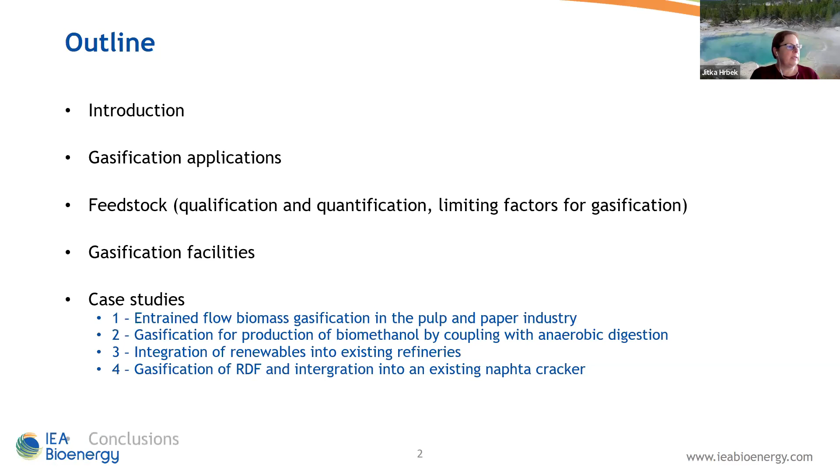Okay, let's start. To outline my presentation, I will start with a short introduction on the topic, then some words on gasification applications and feedstock which is suitable for the gasification process. Then I will describe a few gasification facilities, and we will come to case studies. The report we published in December last year has 4 different case studies on how gasification can be implemented in other technologies. At the end, I will make short conclusions.

So, as I told you, last year we in the task published a report on gasification applications in existing infrastructures for production of sustainable value-added products. Here is the link at the bottom. Here you can find the publication including these 4 case studies, and the aim of the project was to show the high potential of the gasification technology, also to mention the limiting factors for gasification, and last but not least to provide the data for the analysis carried out by Task 42, which will be presented by Johannes today.

Some words on gasification applications. On this figure, you can see a nice overview. We will start with, at best, dry solid feedstock, but wet feedstock is also suitable for gasification. After the gasification, we get a producer gas, and after cleaning and conditioning, we get a syngas. This syngas mostly consists of CO and hydrogen. And from this syngas, it is possible to make several products.

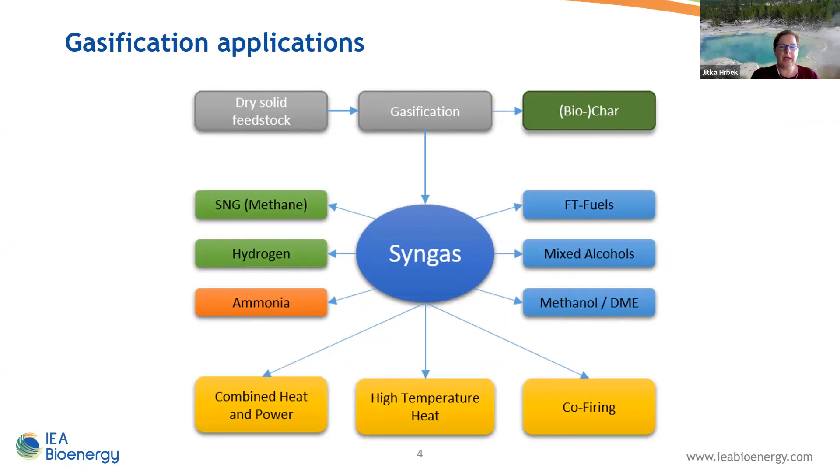Gaseous products on the left-hand side, you can see SNG, hydrogen, ammonia, and liquid products: Fischer-Tropsch fuels, mixed alcohols, methanol or DME. And syngas can also be used for the production of heat, for combined heat and power, high temperature heat, or in co-firing.

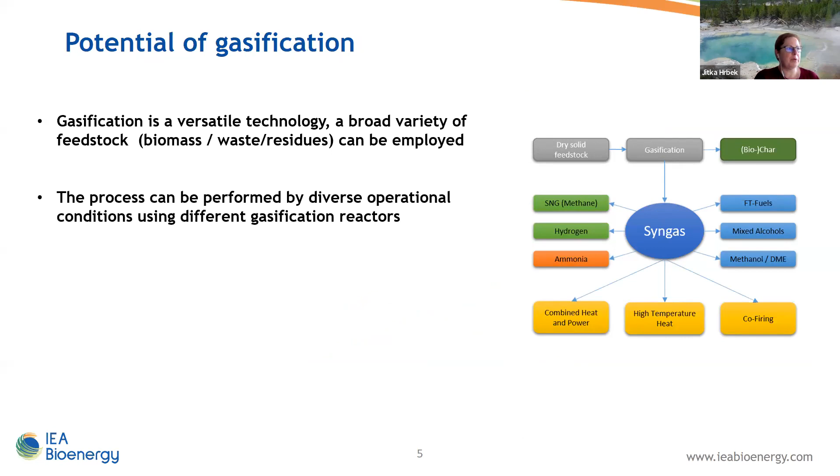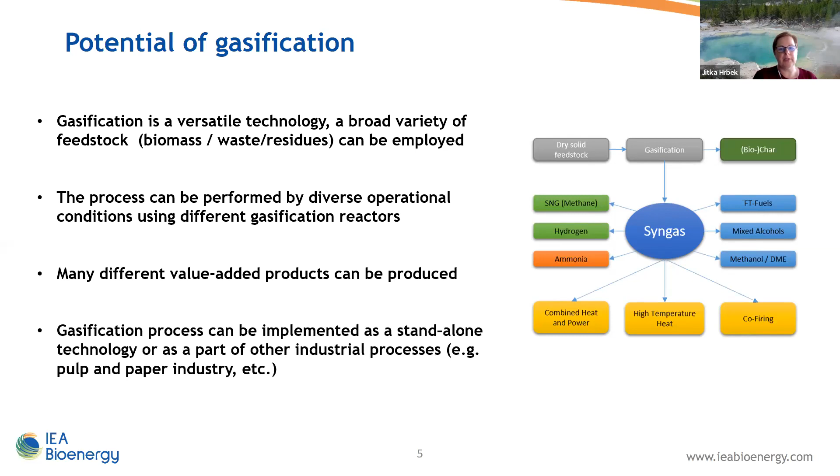Some words on the potential of gasification. Gasification is a great technology because a variety of feedstock can be used. Not just clean biomass is suitable for gasification, but also residues and waste materials can be employed. The process can be performed under diverse operational conditions using different gasification reactors. And as I already told, many different products can be made in this way. Gasification can be implemented as a standalone technology, or in synergy with other industrial processes.

Something to feedstock, which is suitable for the gasification. Here is an overview. There are three main categories: woody biomass and waste, agricultural residues, and residential and industrial waste streams. And if you look at the right side, there is a table which was published by WBA, the World Bioenergy Association, and you can see the potential of the biomass or residues.

I have to point out that in the table, no residential and industrial waste are mentioned. It means the potential is even higher. So if you look at the potential in year 2035, you have here 150 exajoules. And for comparison, the power consumption in Germany in 2021 was about 2.1 exajoules. So the potential is really, really high.

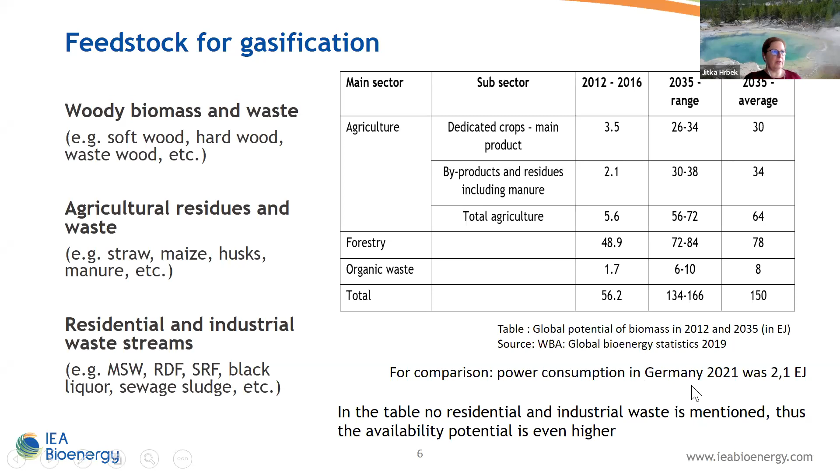So the feedstock: in the report, there are some limiting factors described, which should be mentioned if we are talking about gasification. For the gasification process, the feedstock must be adjusted. It means the size, the impurities must be removed, and the feedstock must be adjusted for further processing. Important is also the feedstock moisture, which has a strong effect on the process efficiency, and also the chemical composition of the feedstock. Carbon, nitrogen, sulfur, chlorine, alkali metals, and trace elements are very important for the right gasification process because they influence the further products.

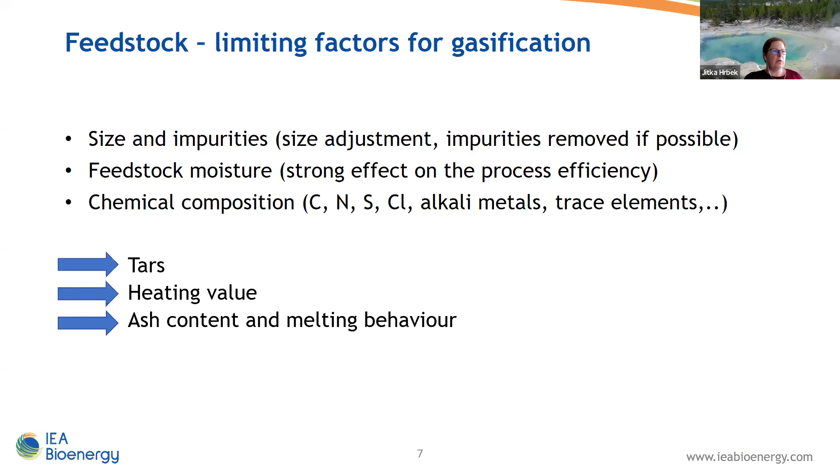Byproducts, tars, heating value of the gas, and the ash content and melting behavior. So if the feedstock contains a lot of chlorine or alkali metals, you have a problem with the melting temperature. Here is an overview of gasification facilities, which are also mentioned in the report. We didn't mention plasma gasification. We described just the classical gasification reactors: fixed bed gasifier, fluidized bed, and entrained flow gasifier.

And now we are coming to case studies. Case studies are the main focus of the whole report because we wanted to show that gasification can be implemented in other technological processes to boost the production or to achieve high efficiency. So case study 1 is on entrained flow biomass gasification in the pulp and paper industry. The author was Joakim Lundgren. He is unfortunately not available today, but he will be able to answer questions per email.

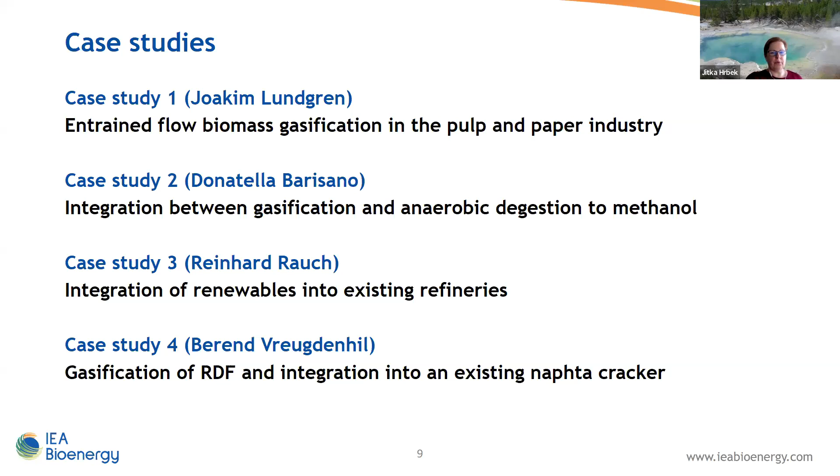The second study was on integration between gasification and anaerobic digestion for production of methanol by Donatella and her colleague. The third case study was made by Reinhard Rauch; the topic was integration of renewables into existing refineries. And the fourth case study by Berend Vreugdenhil: gasification of RDF and integration into an existing naphtha cracker. So case study number 1, entrained flow biomass gasification in the pulp and paper industry.

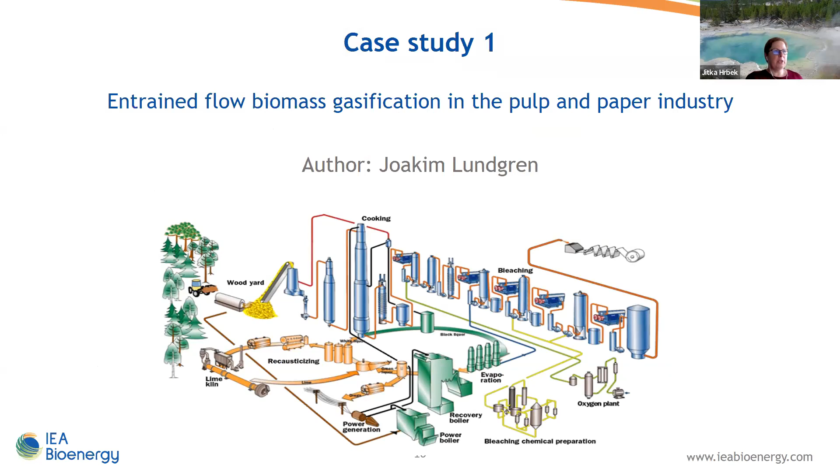As an introduction, I have to point out that pulp and paper plants are really highly suitable for the integration of biorefinery concepts and thermal gasification-based concepts, and byproducts can be used in the process. The product gas can be used for high temperature heat for the companies, for the process itself, or it can be upgraded in more advanced applications like biofuels or biochemicals, and as well for drying purposes, which are needed for several technological processes.

So what are the benefits of integration of gasification in pulp and paper industries? It's an efficient heat integration, as I said already, high temperature heat, for example. The investment costs are reduced because there is co-use and synergy of existing processes and equipment. And there is also experience in feedstock handling, processing and utilization. Here are several examples of integrated gasification units in pulp mills. Most of them are in Scandinavian countries, but also in China and Indonesia, and mostly they replace heavy fuel oil, or they are used for high temperature heat in the process.

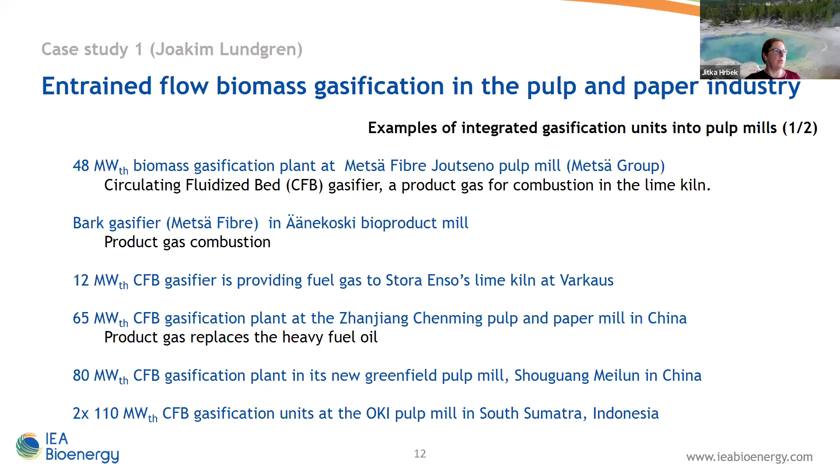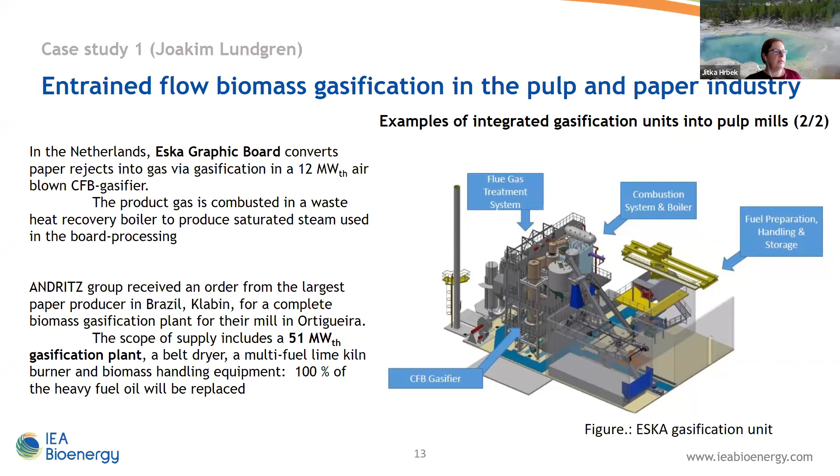We have also some other examples. For example, in the Netherlands, we have the Eska Graphic Board company, which converts paper reject into gas via gasification in a 12 megawatt air-blown CFB gasifier, and the product gas is combusted and used for steam production. And we also have the news that the Andritz group received an order to build a gasifier in Brazil. It should be a 51 megawatt gasification plant together with a belt dryer, built in the mill in Ortigueira.

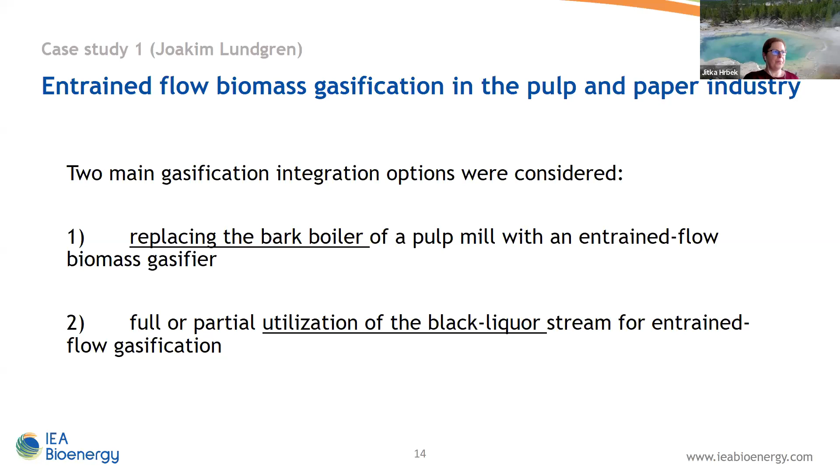In this case study made by Joakim, there were 2 options considered. If we want to integrate the gasification process into the pulp and paper industry, we have the possibility to replace the bark boiler of the pulp mill with an entrained flow biomass gasifier, or the second pathway was full or partial utilization of the black liquor stream for entrained flow gasification. And the results.

Unfortunately, we do not really have enough time to describe the case studies in detail. But here are the most important conclusions. I would like to invite you to visit our website and check the details for each case study.

So to conclusions, Joakim concluded that conditions for biofuels and chemicals production are more favorable in kraft pulp mills due to the already available feedstock, woody residues, and black liquor, which is really fine for efficient heat integration. The overall energy system efficiency is generally higher and the performance is better if it's integrated in a pulp mill instead of a standalone operation.

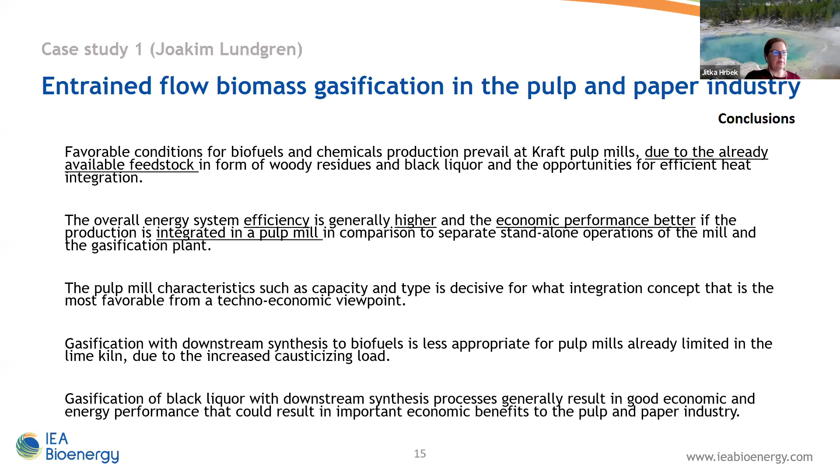And the gasification of black liquor with downstream synthesis processes results in good economic and energy performance. So it's really supported for this process. So this was case study number 1. And now we have case study number 2.

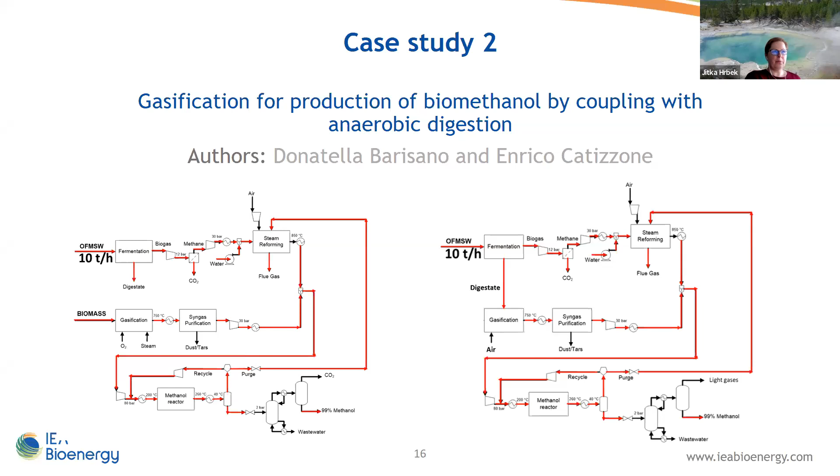The authors are Donatella Barisano and Enrico Catizzone. The topic was gasification for production of biomethanol by coupling with anaerobic digestion. And what were the drivers for this study? It was that methanol has a large employment and it's a key chemical alone, or as an intermediate as well. Anaerobic digestion is a proven technology since many years, and based on many scenarios, the potential is still increasing. So we can see more and more biogas stations over the world.

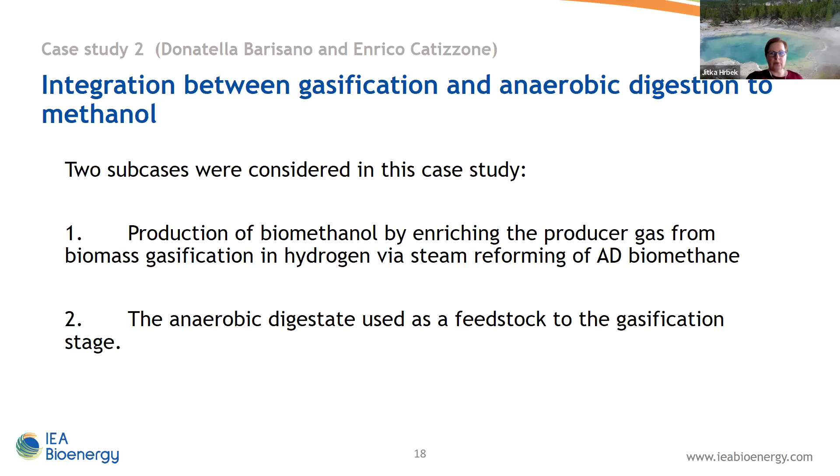And the coupling of thermochemical gasification with anaerobic digestion was chosen to boost the production of biomethanol. Also here, 2 subcases were considered in this case study. The first one was the production of biomethanol by enriching the producer gas from biomass gasification in hydrogen via steam reforming from the AD biomethane plant. And the second case was the anaerobic digestate, which was used as a feedstock for the gasification process.

How did Donatella and her colleagues do it? So something on materials and methods. In subcase 1, the gasification unit was based on a steam oxygen gasification process. It was a bubbling fluidized bed and the temperature was between 820 and 880 degrees. It was coupled with a filter and scrubber. And in subcase 2, a rotary kiln reactor was chosen. Air was used as a gasification agent, and the process was carried out at a temperature between 800 and 830 degrees C.

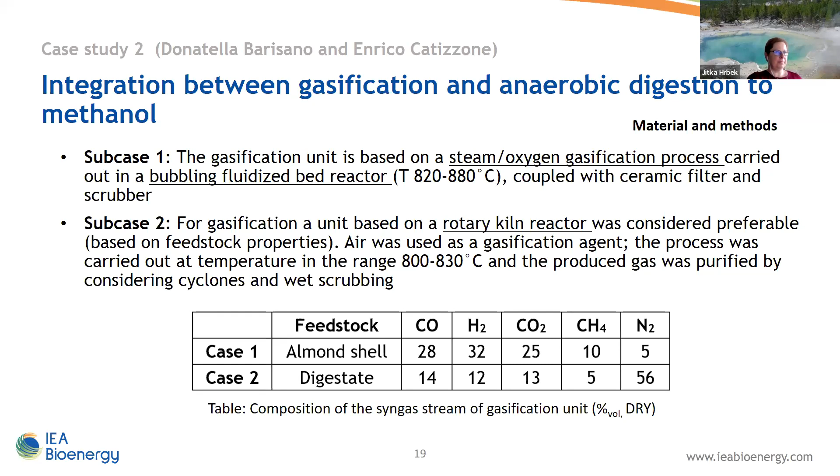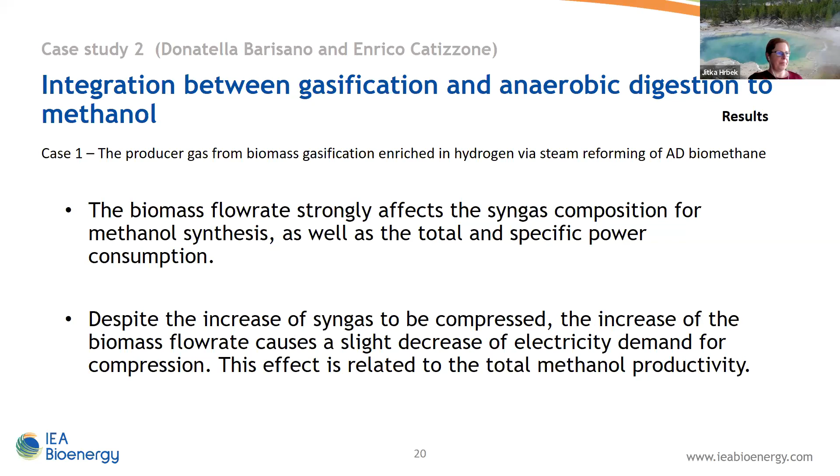So something on the results in case 1. In this case, the producer gas from biomass was enriched with hydrogen from the AD plant. The biomass flow rate strongly affected the syngas composition for the methanol synthesis and the specific power consumption. And it should be said that despite the increase of syngas to be compressed, the increase of biomass flow rate caused a slight decrease in electricity. The effect is related to the total methanol productivity.

And in case 2, the digestate was used as a feedstock for the gasification, and it seems to be a promising way of producing methanol, though the productivity of methanol is slightly lower in this case. It is better in subcase 1, and Donatella thought this may be associated with a different syngas composition. In fact, it provides a possible alternative to use this digestate as a feedstock for gasification if there is enough of it. Otherwise, it is also used as an agricultural soil improver.

So that was case study 2, and now we have case study 3. This case study was made by Reinhard Rauch and his colleagues. The topic was integration of renewables into existing refineries, and how renewables can substitute fossil fuels in the refineries. The aim of the study was to show the complete synthesis pathway of the biofuels. It was studied on site in one of Germany's largest refineries, Mineralölraffinerie Oberrhein. The abbreviation is MiRO.

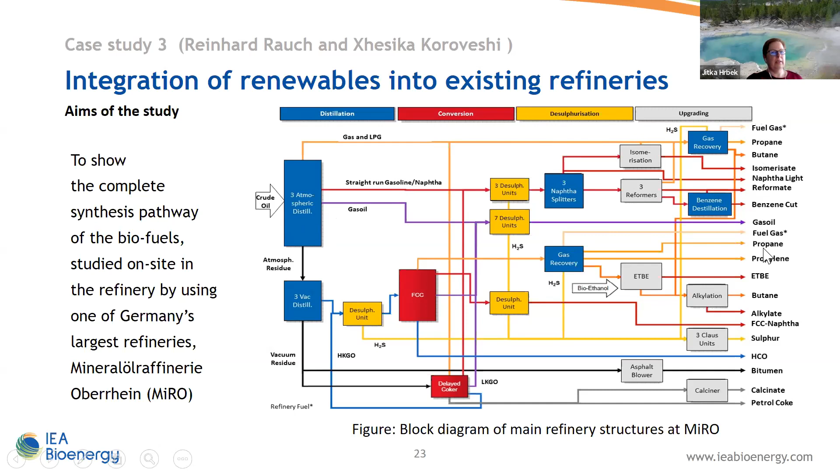Also, in this case study, two different pathways were compared. Sub-case 1 was focused on the Fischer-Tropsch process. This Fischer-Tropsch process is more adequate for synthesis of high-quality diesel. In sub-case 2, it was methanol, DME to gasoline, and this sub-case was focusing on high-quality gasoline components.

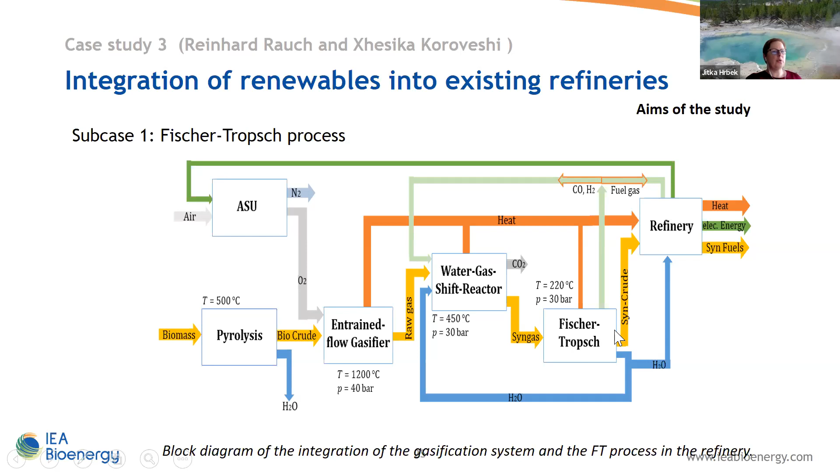So here you can see a block diagram of the integration of the gasification system. It was sub-case 1, the Fischer-Tropsch process. You start with staged gasification. The first stage is pyrolysis, then the biocrude is fed into the entrained flow gasifier, and after water gas shift, you come to Fischer-Tropsch synthesis, and this syncrude will then be sent to the refinery for further processing.

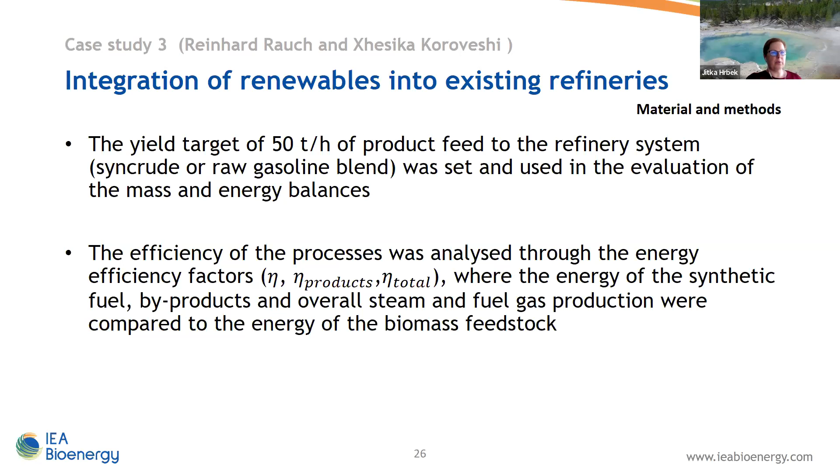Something to materials and methods. The yield target of 50 tons per hour was... feed was mentioned to send to refinery system, and it was set for the evaluation process. And also the efficiency of the process was analyzed through the energy efficiency factors, where the energy of synthetic fuel byproducts and overall steam and fuel gas production were compared to the energy of biomass feedstock.

We have here these two sub-cases. The Fischer-Tropsch raw product can be treated in a refinery as a synthetic crude oil in a similar way and fed with the conventional crude oil into the atmospheric distillation unit. Then it is processed in the refinery structures, and the main end product is expected to be diesel, with byproducts such as gasoline and light hydrocarbons.

The second case, MtG and DtG processes produce a raw product. As I already told you, it's focusing on gasoline. It is comparable in quality and composition to the reformate of the catalytic reformer in the refinery.

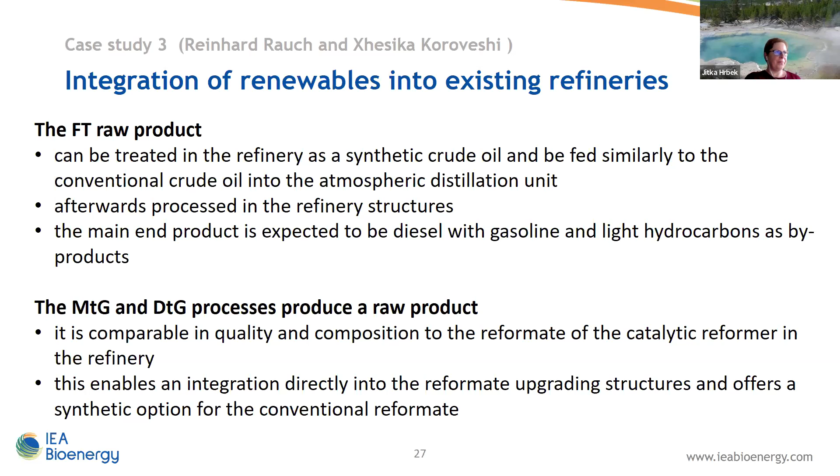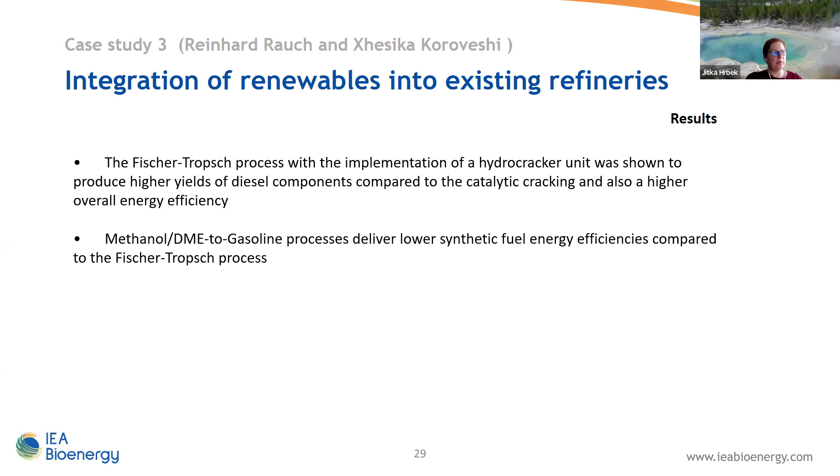And something to the results of case study 3. The Fischer-Tropsch process with the implementation of a hydrocracker unit was shown to produce a higher yield of diesel components compared to catalytic cracking, and a higher overall efficiency. Methanol or DME to gasoline processes deliver lower synthetic fuel energy compared to the Fischer-Tropsch process.

And amongst the methanol to gasoline and DME to gasoline processes, the DtG process could deliver a higher yield of synthetic gasoline, so a higher synthetic fuel energy efficiency compared to the MtG process can be reached. The integration of the Fischer-Tropsch process turned out to be slightly more economic compared to methanol or DME to gasoline processes.

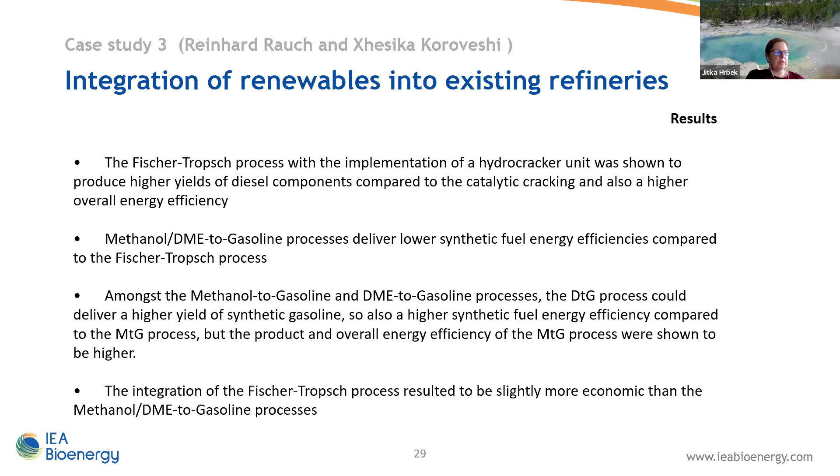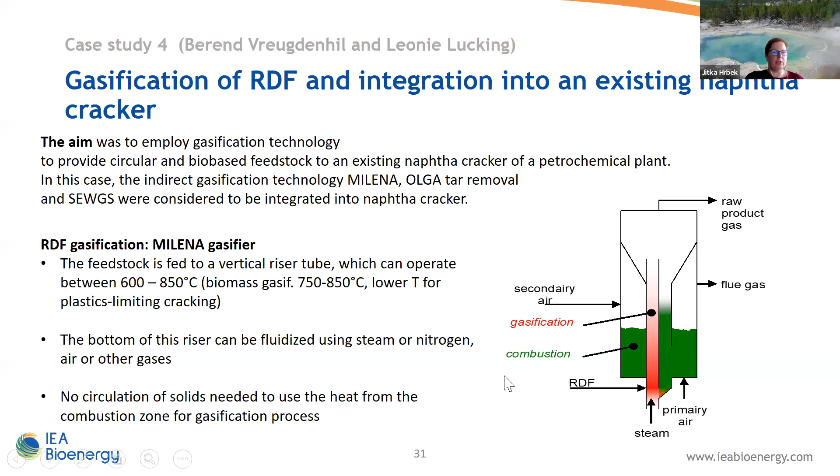There's a gasification part here, and here is the combustion part. The heat from the combustion part can be given to the gasification part. So in this reactor, no circulation of solids is needed. And the bottom of the riser can be fluidized using steam or nitrogen or several other gases. So it's flexible.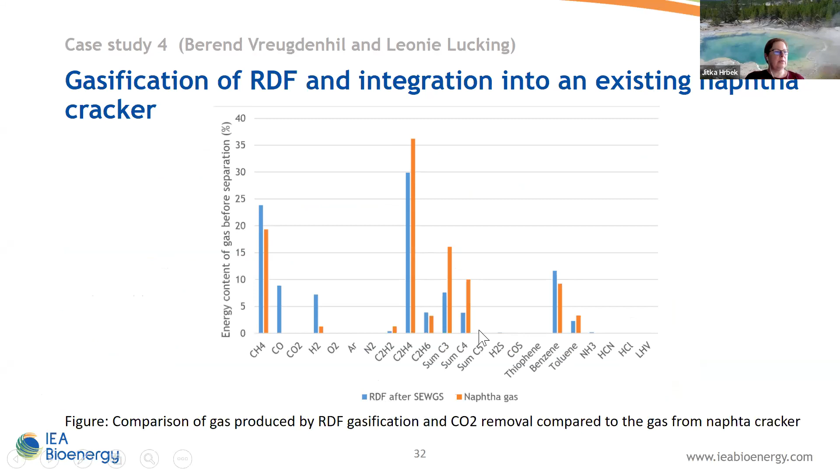Berend also mentioned in his case study the comparison of gas produced by RDF gasification and CO2 removal, and he compared it to the gas from the naphtha cracker. You can see RDF here in blue and naphtha gas in orange. Here is the setting for the mass and energy balance made by Berend. You start with the gasification in Milena, then you have tar removal, and then the sorption enhanced water gas shift reaction.

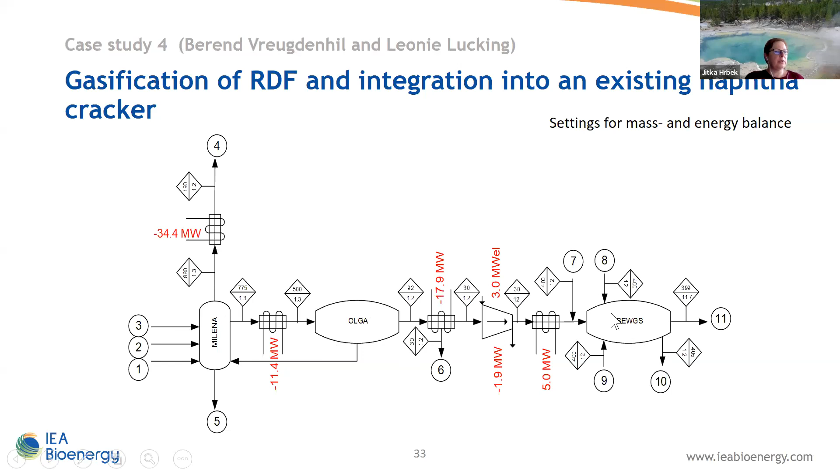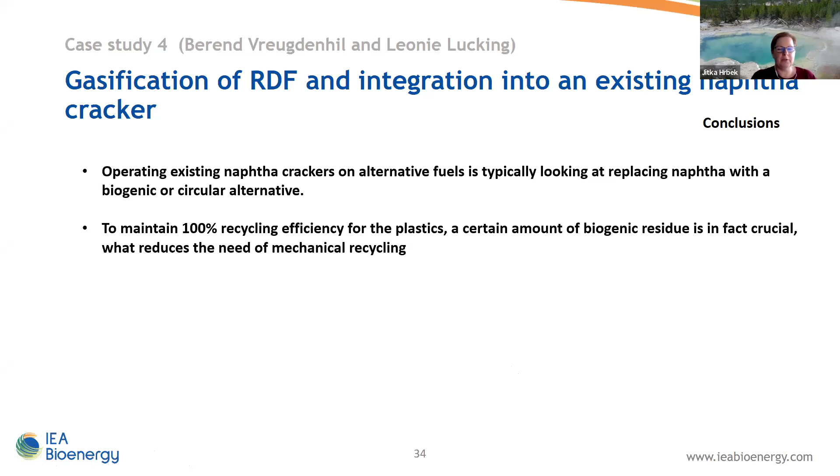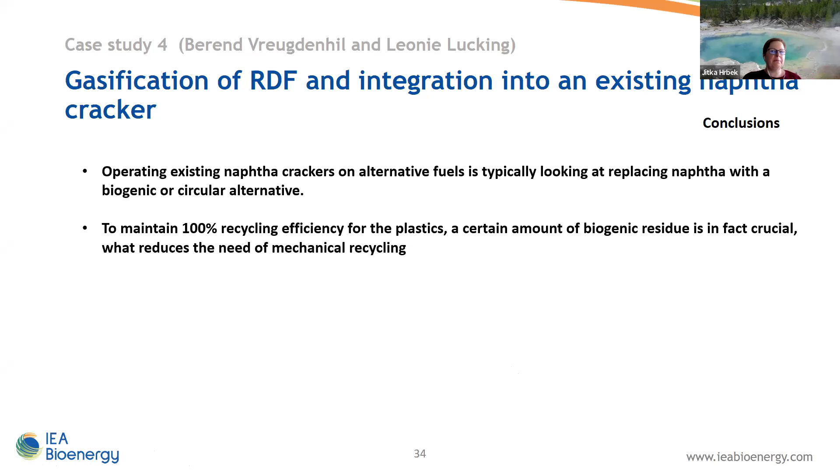And the conclusions: operating existing naphtha crackers on alternative fuels typically means replacing naphtha and fossil fuels with biogenic or circular, meaning mixed waste, alternatives, and to maintain 100% recycling efficiency for the plastic, a certain amount of biogenic residues is crucial for the process. Anyway, it's also a benefit that no mechanical recycling is necessary.

And very important will be the policy frames for this process and for the development in this field. The focus is to generate as many circular materials as possible from waste, and the gasification route needs to be supported with a CO2 mechanism favoring the sequestration of biogenic carbon.

And some words to conclusions. So in this report, we wanted to highlight that gasification is a versatile technology because several feedstocks can be used in this way. It's not just clean wood, it's also waste and residues, agriculture or forestry residues, or even municipal solid waste or industrial waste streams and so on.

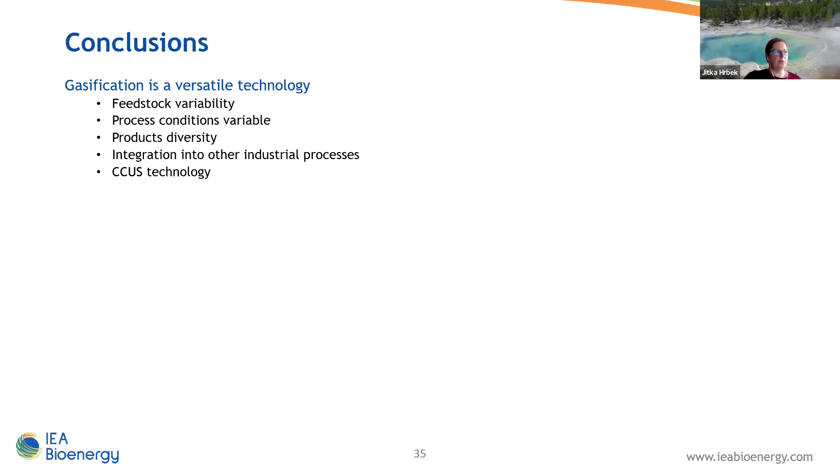The process conditions are also variable, so you can use several temperatures, several oxidating agents, several reactors as you like. And also you can produce many different products, liquid biofuels or gaseous biofuels or biochemicals. You can make bioenergy from that. And it's also good to integrate the gasification process into other industrial processes. And last but not least, we have to mention that gasification is a very suitable technology for carbon capture, utilization and storage.

So in these 4 case studies, we illustrated partly the potential of the gasification technology. It's clear that there are more case studies which were not included in the report. But anyway, we included these 4 different case studies to illustrate the potential: employment in the pulp and paper industry, methanol production, coupling with AD plants, integration of renewables in existing refineries, and RDF gasification and integration into a naphtha cracker.

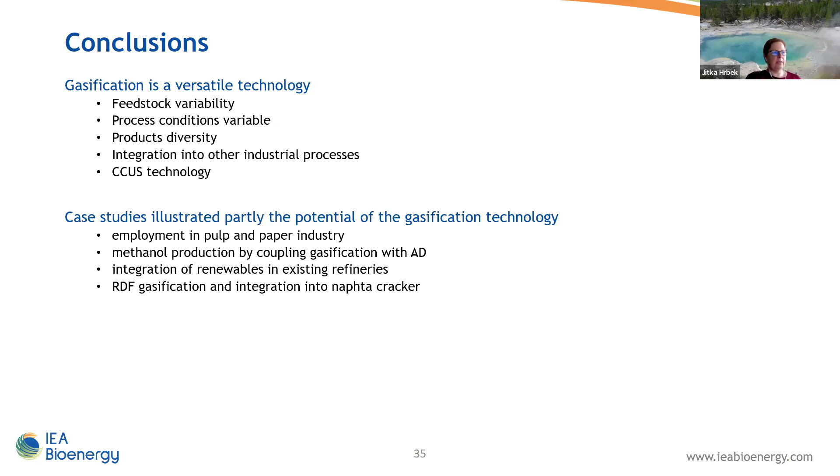And the message from this presentation should be that gasification processes offer a wide application in the field of bioeconomy or biorefinery concepts to utilize residue and waste streams. So it means circular economy. And this increases the overall efficiency of the conversion process and also optimizes the materials and utilization.

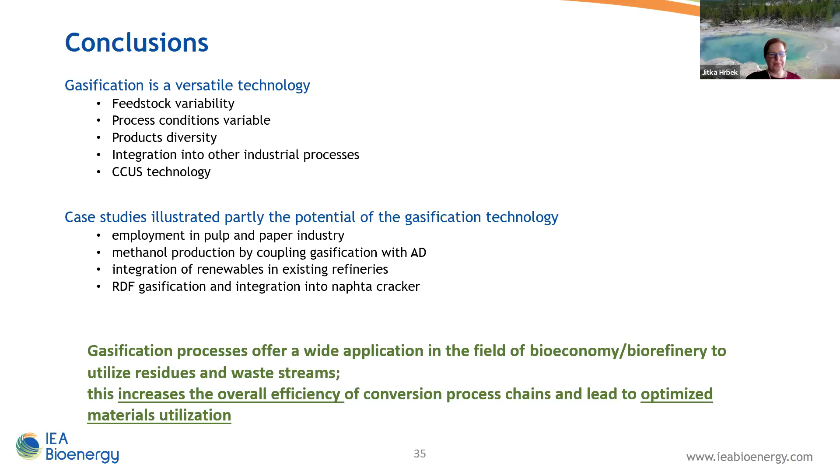Thank you, Jitka. Yes, there's quite a few questions in the chat which are being answered at the moment by Reinhard, and also I answered some questions myself. But maybe to you, Jitka, the first 2 questions you might be able to answer. The first by Loic Leclerc: is the potential the actual mobilizable potential, or the theoretical? Meaning, is some of the feedstock already claimed by other processes? So that was about the feedstock availability that you showed.

Yes, it was feedstock availability, and it was a theoretical potential of the feedstock. So it's clear that the feedstock can also be used in other different ways, not just for gasification. So it was a theoretical overview. Yeah, I think that's in general the case with most feedstocks, that they are often utilized in other ways, but not per se the best form.

And the second, maybe you have an answer to that, by Ayush Agarwal: which analytical tools and techniques do you use to measure trace elements in the feedstock? And what is the order of magnitude of the concentrations of the analytes, ppm, ppb, or something else? So for this, we have a special analyzer for the metals and for others. So I think it's equipment of each laboratory. So we have no special techniques for that.

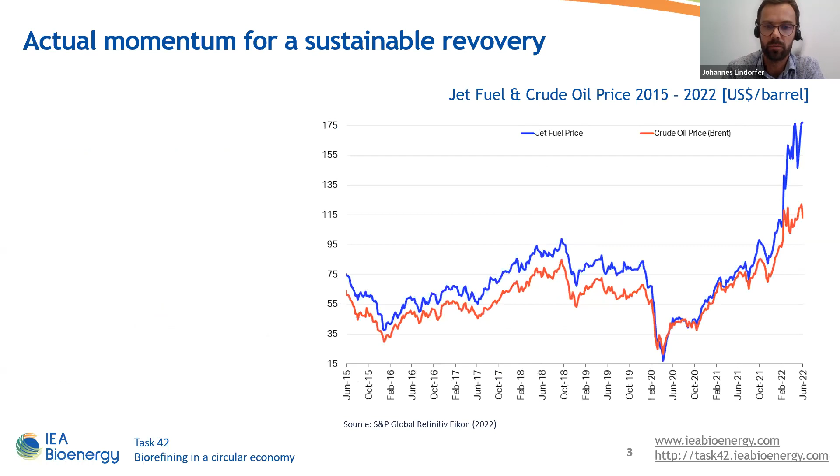So we feel that there is for sure a strong driver, especially by the European Commission with its Fit for 55 package at the moment, where the EU ETS scheme is a really major decarbonization tool. So the enablers like biorefineries for that transition towards renewables, towards a circular economy, really can take off at the moment. And the strong candidates for this have been presented also by Jitka.

So we see on the biorefinery in general that there are a lot of technological solutions out there and under development. The challenge in that sector is really to appropriately implement and potentially also combine them, as presented by the case studies by Jitka.

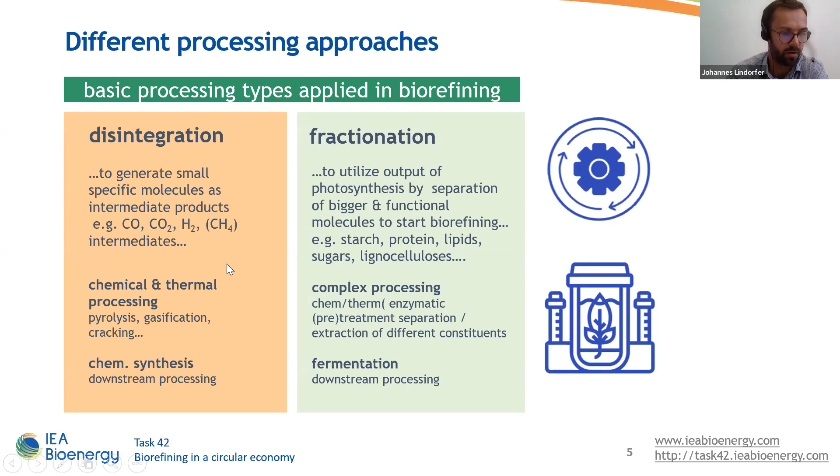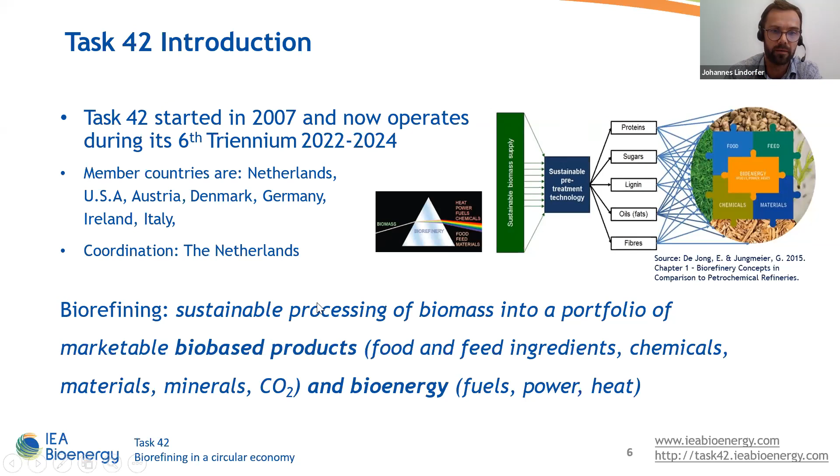Concerning the IEA Task 42, it's a collaboration that is targeting the sustainable processing of biomass into a portfolio of marketable bio-based products. So looking at the chemicals, the materials, the minerals, and the bioenergy as a fully integrated scheme and technological options there.

There has been quite a lot of output, so I really encourage all the participants here to visit our website, task42.ieabioenergy.com, and go for the different outputs, reports, published newsletters. There are country reports on the status of the biorefineries to facilitate commercialization, market deployment, and the various aspects that are related to that.

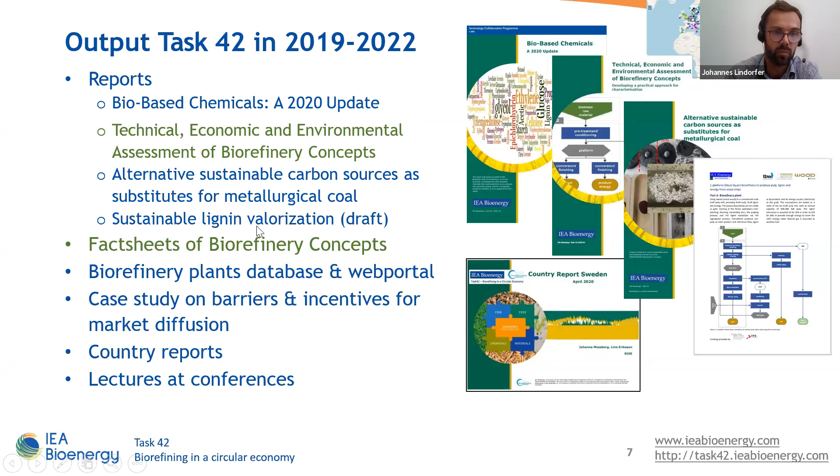And one topic I'm working on is this so-called TEE assessment. So it's a technical, environmental, and economic assessment approach. We are generating generic, very basic initial biorefinery models that can act as a baseline, as a showcase. And then we're also trying to encourage stakeholders for that technology evaluation, because it is quite a complex topic and you need a lot of knowledge to get the right numbers in place for that evaluation.

So that's why we are quite happy for that cooperation also with Task 33, where the experts on gasification are, and then we can take their case studies and build it into that scheme and modeling.

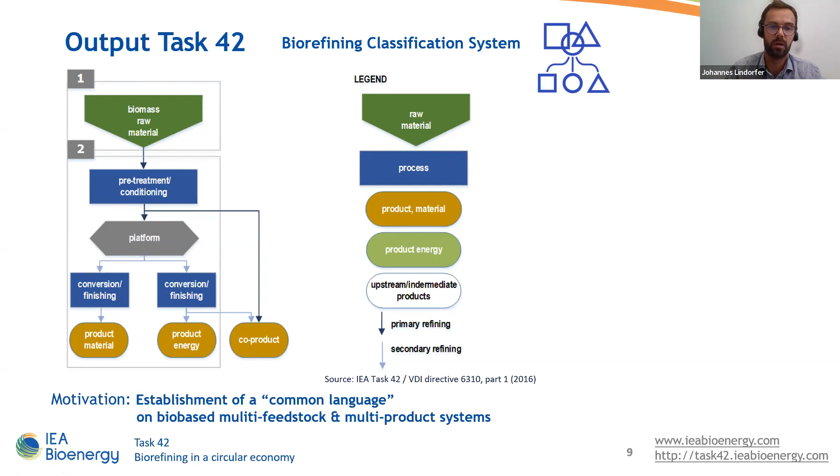What has been the output of Task 42, or what is relevant for the assessment I'm presenting here, is also this polyhierarchical classification system in order to establish a common language on bio-based multi-feedstock and multi-product systems, which are biorefineries basically. So starting from the raw material, having different processes, and then generating platforms which are further converted to a material product, an energy product, and sometimes also co-products. So the idea is to condense very complex technical systems into a very simplified schematic illustration.

What is the TEE assessment about? So the idea is to follow a stringent approach via defining key case study characteristics at the beginning of the assessment. So what is the system boundary? What is the basic flow chart? What does the process look like in a very simplified schematic? Then filling this with quantitative numbers in terms of the input and output balance of the bio-based system, and then comparing it to a reference system, which is at the moment basically a fossil-based one.

When you have all the key characteristics, put together in the scheme that you need, then you can go to what we call a value chain sustainability assessment, where it's all about the environmental impacts, going for very basic, common indicators such as global warming potential, and then deriving CO2 savings compared to the benchmark for the specific, in that case, gasification-based biorefinery setup.

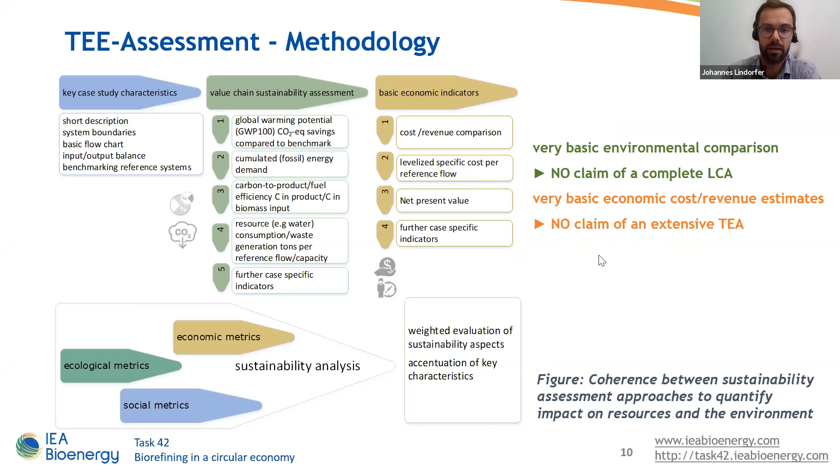So that's just a bit of a deeper dive into what are the methods and tools that we apply and instruments for the financial impact estimates. The whole story is also based on a norm. It's the VDI 6310. And the net present value is a nice economic indicator that we go for if we have the data available.

So CAPEX, it's quite straightforward. We consider depreciation effects over a lifetime of 10 years in the case studies that I'm presenting now, and the interest rate of 5%, operating hours per year, full time, so 8,600 hours per year. The OPEX are comprising the main raw materials, additional operating expenses, and maintenance. So very common.

Procedure for the environmental impact estimates. So we are also not claiming a full LCA in that respect, but we are looking at the systems with specific emission indicators and emission factors, also considering the upstream. So it is partly aligned with current legislations like the calculation methodology in the European Renewable Energy Directive, or also in the US, the Renewable Fuel Standard, but it's probably a bit condensed compared to a full life cycle assessment.

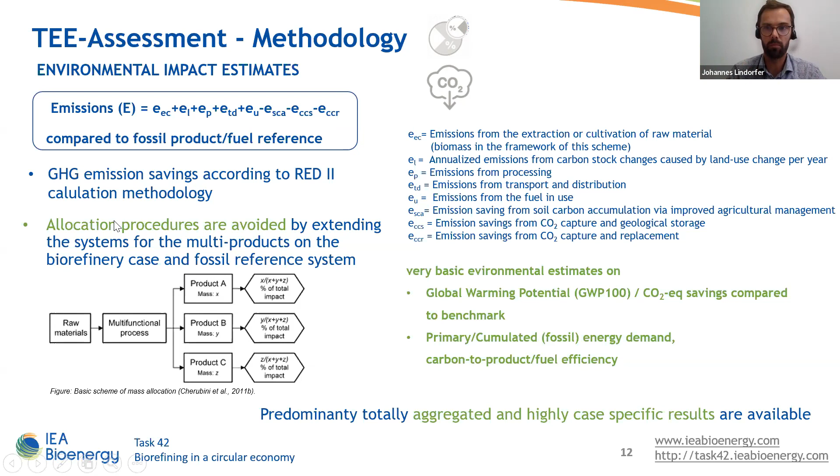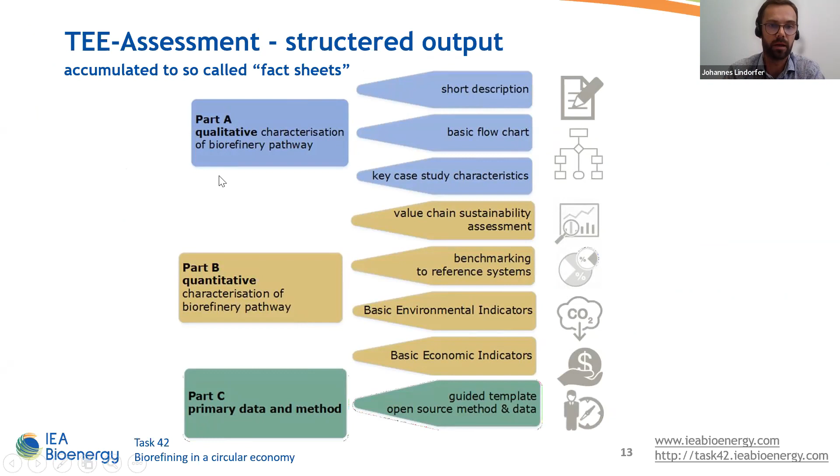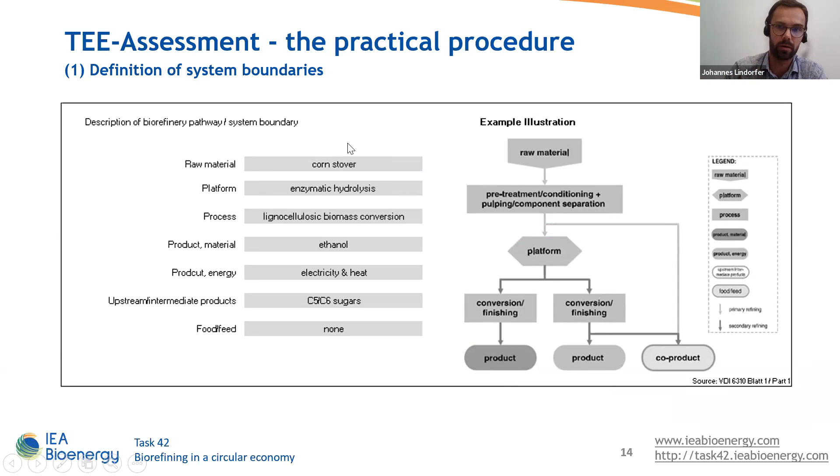So when this all has been done and put together, we accumulate the data to so-called fact sheets that follow that appearance that I've already described. I would like now to really go into this practical procedure, how the things are compiled. So at the beginning, we are starting on a very high flight level in terms of the example illustration. What are the main parts of the technology that we're looking at?

Then we go for the system boundaries. So normally it's cradle to gate, where our case studies are situated, because we know, okay, the biomass-based feedstock, so biomass cultivation, and then to the standardized gasification-based fuels, and also additional energy carriers there.

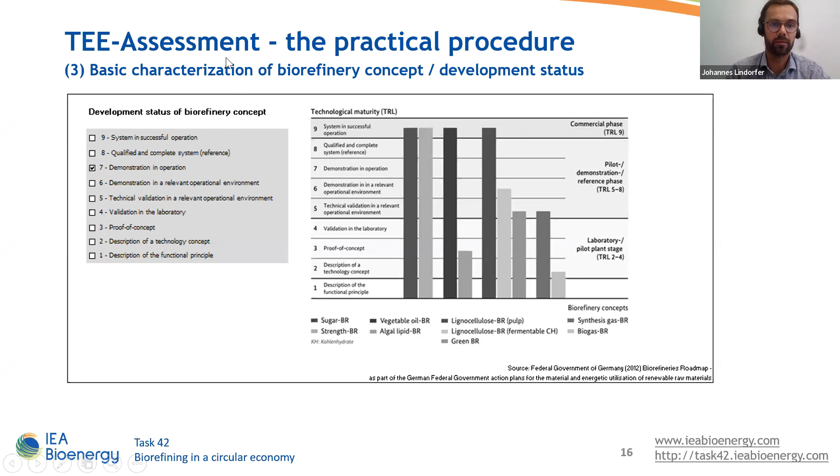What is quite relevant is the development status. So if we're yielding data from a simulation, or whether we have data from real-world proof implementations in an industrial environment, that totally puts another spotlight on the value of that data. So this is quite relevant to be distinguished between.

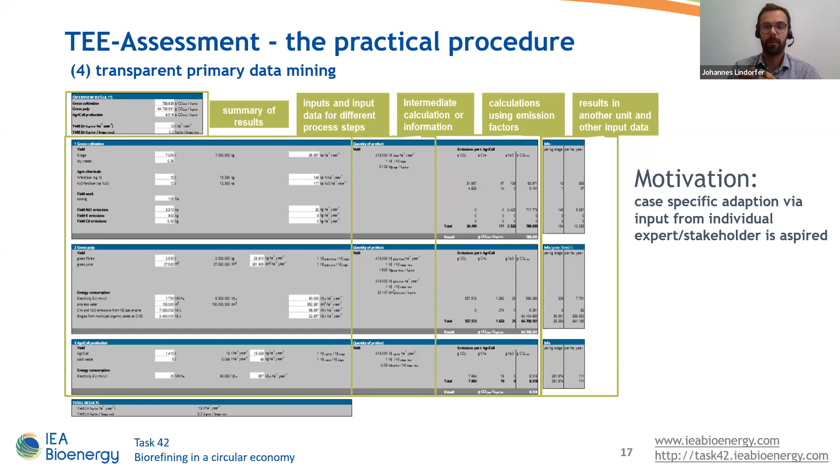And then it's about the data mining. So going step by step through the processes and compiling the mass and energy balances of the unit operations, and then summing it up to an overall figure, basically, along the value chain.

So the modeling that has been done there was strongly focusing on the implementation into the refinery system, as Jitka was mentioning, and we basically then additionally put on to this the whole feedstock provision and the gasification itself. And this is then the translation of the technical simulation analysis towards that method, towards that part A that is looking at the case study.

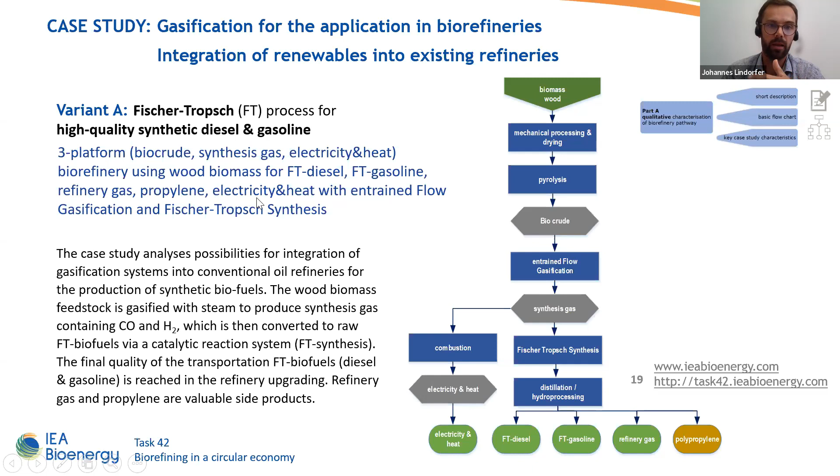And so we have here a 3-platform biorefinery with biocrude, synthesis gas, electricity, and heat as the platforms, using wood biomass as a feedstock for the production of Fischer-Tropsch diesel, Fischer-Tropsch gasoline, refinery gas, propylene, electricity, and heat via entrained flow gasification and Fischer-Tropsch synthesis.

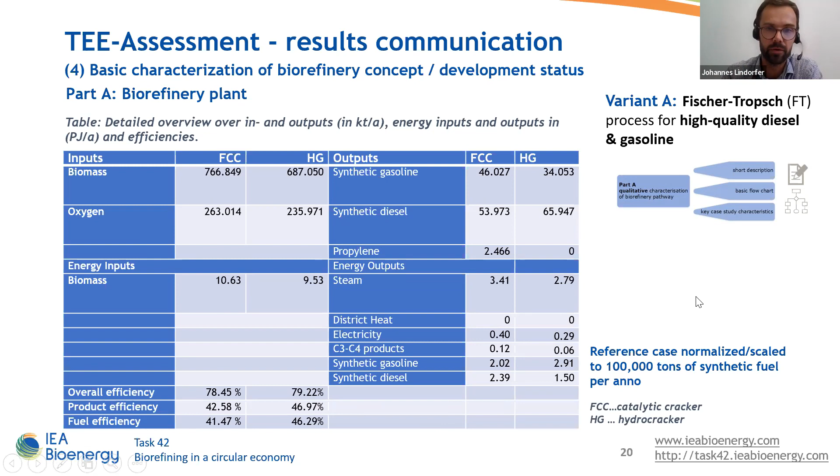And what also is probably relevant, we normalize such a case to a certain level of output, we can call it scaling. Here it is 100,000 tons of synthetic fuel per annum, so combining gasoline and diesel for that case.

The next part is about illustrating this normalized mass and energy balance. So looking at the mass balance, comparing input and output for the major various fractions, the very simplified energy balance is displayed here, where for sure the strong demand is from the biomass feedstock.

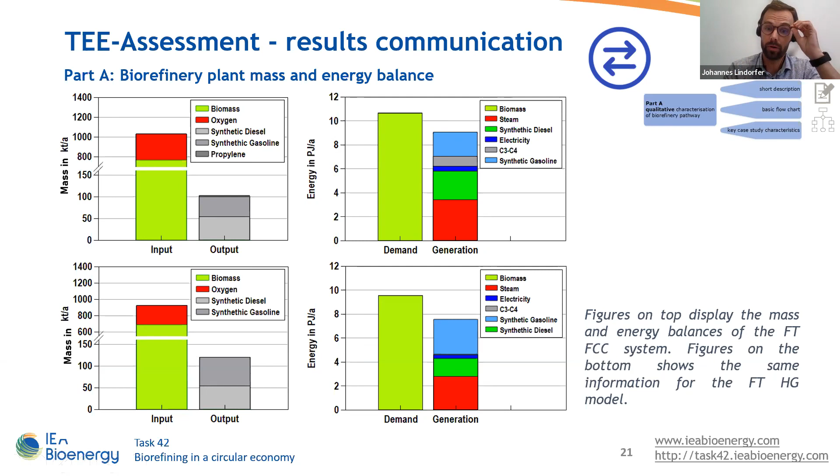And those are the two. So the two graphs on the upper side are related to the FCC system, and the lower ones are pretty much comparable, but for the FTHG modeling. You see slight differences in the product portfolio that are displayed here, but the aggregation level is a very high one. So it is really summed up with that method.

It is quite clear or known by all of you or everybody who has ever compiled such studies, techno-economic studies, or written those or read about it, that all in all, it's absolutely relevant what are the basic assumptions behind that. And our approach is really to strongly display what is the basic assumption and to go out with that in order to also discuss and refine it, because for sure it's a very static approach.

And as I've shown in the second slide, highly fluctuating prices can definitely not be fully reflected with that static approach. But for sure, for that, you can add on additional sensitivity analysis, and you get a first feeling and impression what might be beneficial, where are the points to turn, where are the influential hotspots for the assessment.

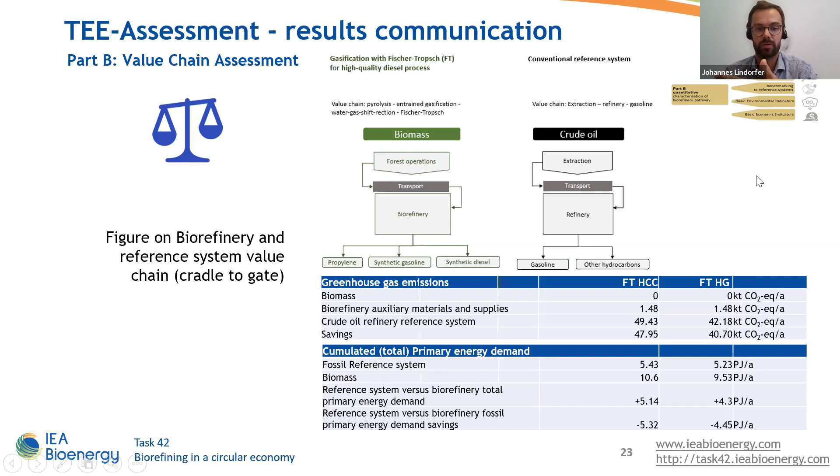Coming from the economics towards the environmental impacts, we are comparing the biomass-based system, so the biorefinery setup, with a fossil-based system to generate equality in terms of the service capacity of the technology and the outputs. When we compare that, it is tremendously visible that especially for the greenhouse gas emissions and also for the primary energy demand, the biorefinery setup is close to energy self-sustaining, or basically designed to energy self-sustain. And therefore the emissions are enormously low. And so these integrations are enormously beneficial in terms of GHG savings. So these are highly significant.

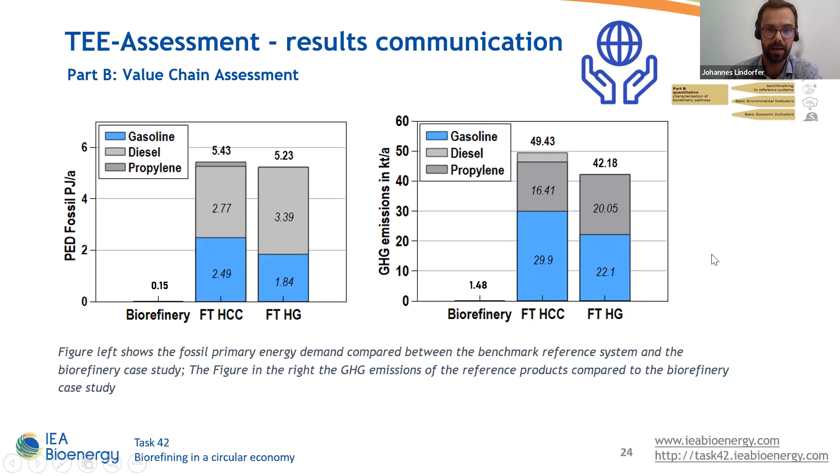In terms of the primary energy demand, we see that when we compare the biomass input versus the end products, there for sure is a strong increase in energy density. So you need significantly more input because also of, for sure, the conversion efficiency. But the idea is really to be comparable and to be transparent on that side.

So what we really see is that this expansion of the material product portfolio can absolutely bring additional value creation for different products. So here you see propylene, as this is different for that scale, for that setup, but also additional options are waste heat utilization for additional marketable products for the setup.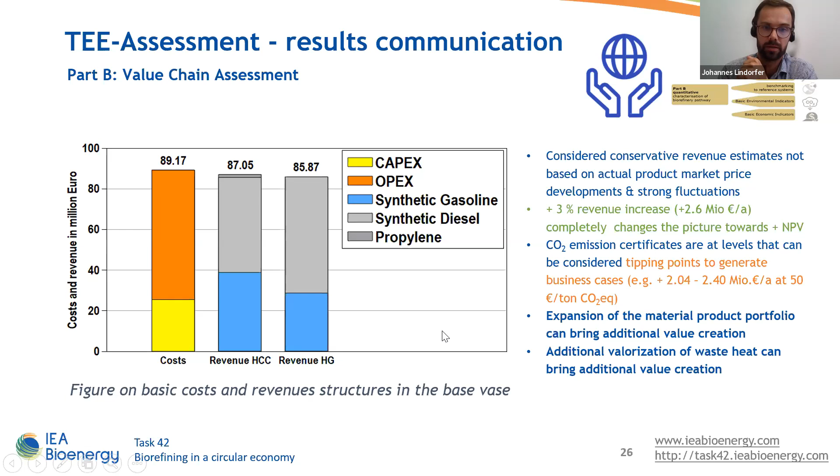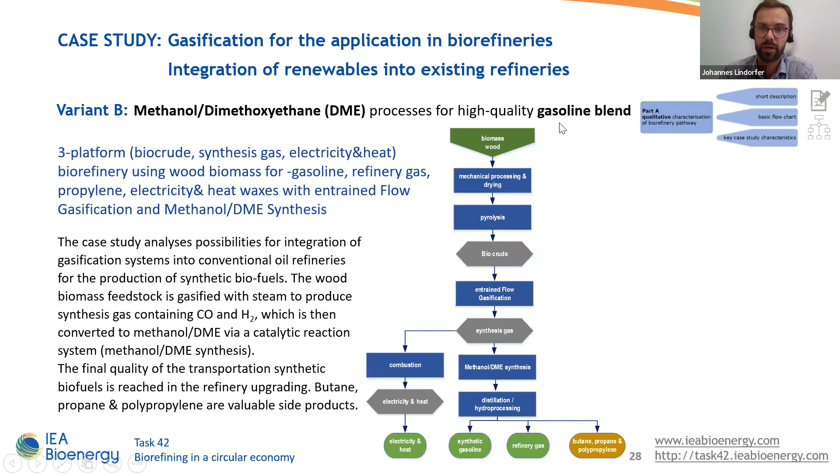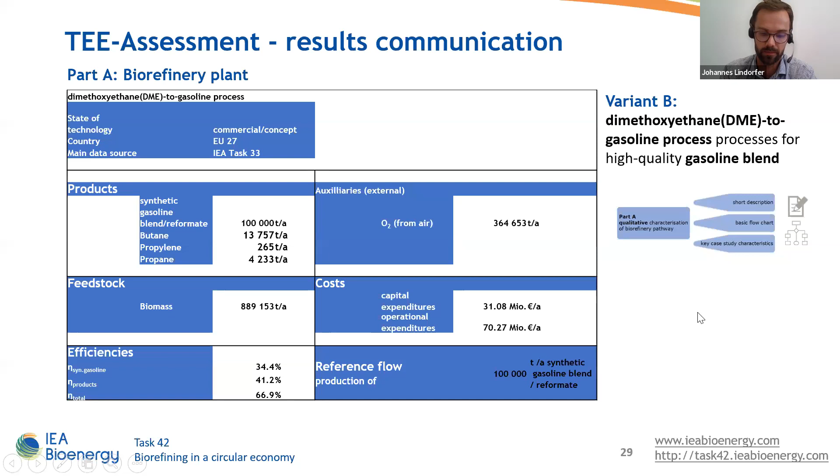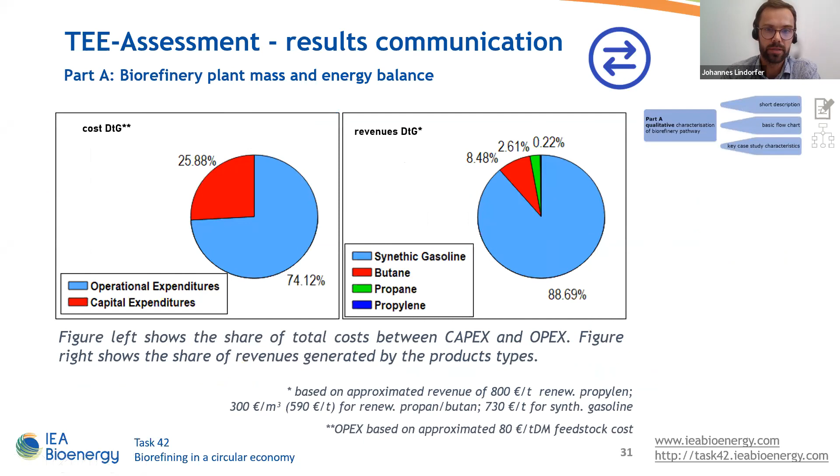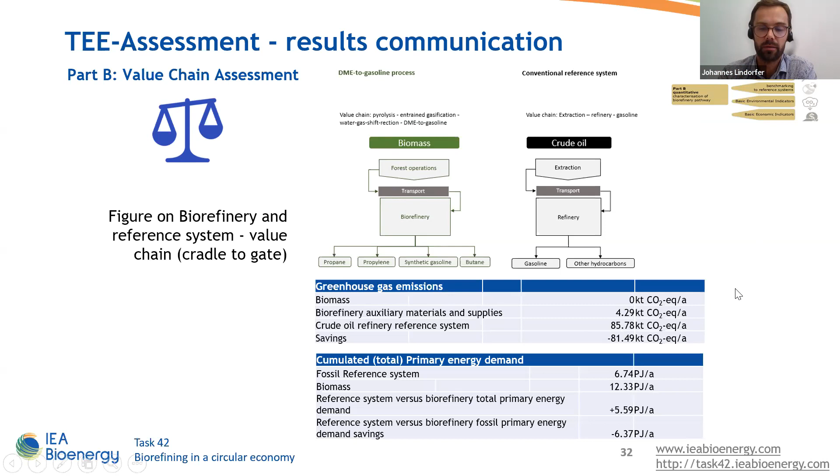Same done for the cost structures and the revenue structures, and also for the greenhouse gas emission calculations. Enormous savings on that side, and those are the real tangible and strong benefits for an implementation when we roll out such a technology. So this again is a comparison on the primary energy demand. We see this rather high biomass uptake for providing the product energy content, but also the energy provision within the conversion process.

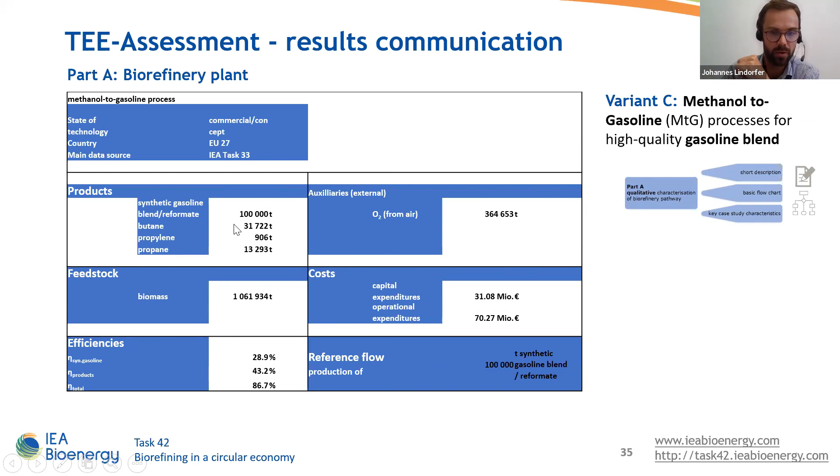And with that, I dive into my last case study that I've prepared for today. It's on the methanol pathway, methanol to gasoline, and the gasoline blend. Again, the reference flow is the 100,000. So changes are normally especially on the efficiency side and for sure on the product side. Here it is illustrated in the same representation.

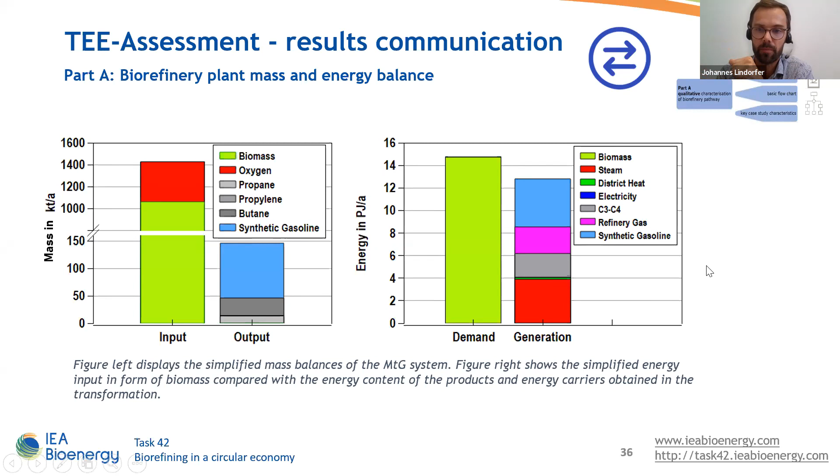Again, the generation of the product portfolio is very versatile for that setup, and we have implemented specific cost structures and revenue structures for those products to compare them and to calculate the CAPEX and OPEX for that. And we see really this strong influence on the process economics by the price, and that's also for the availability of the feedstock and raw material.

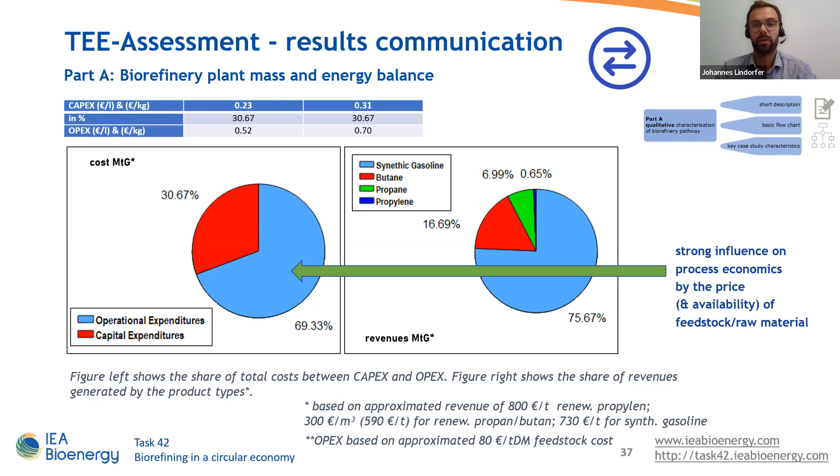So here we have quite conservative assumptions in that we use very standardized woody biomass feedstock with approximately 80 euros per ton dry matter. That's a rather high cost. So low cost feedstocks will generate favorable economic results also in that representation. Again, the savings are really significant. We can reach enormous greenhouse gas savings and positive substitutions for fossil fuel consumption with a relevant implementation of such a case.

So I will go quite fast through those slides, but what I would still want to point out, if we look at such a case, also the main fuel product is really decisive. So when we have a look at the synthetic gasoline, which is the blue bar, then okay, for sure it's the main mass proportion that is outputted from such a plant, from such an implementation. Therefore, it's really essential to yield a significant price for that main product.

And here also the obligation is from the public and political instruments to set a reasonable pricing and to enable therefore also additional implementations of such technologies, because you have a very broad product portfolio, but the revenues for the main product that are reasonable and that can bring an economic life towards such implementations is really relevant and essential.

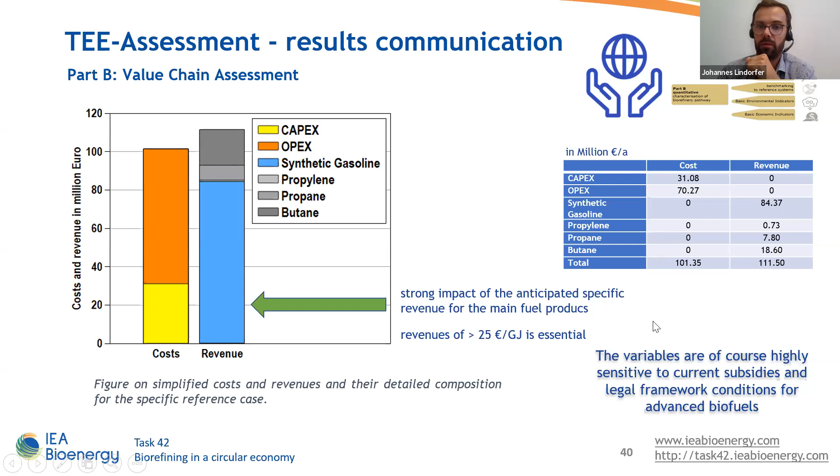So there are a lot of variables on that, but current subsidies and the legal framework conditions for advanced biofuels are really sensitive. That's not just for Europe. I'm pretty sure that's for the whole world, for that assessments. So I'm trying to bring some lessons learned for the case studies.

We have done also a stakeholder consultation by an extensive survey on the topic. And we really saw, okay, it is quite complex to get data from people working in the field, because there are a lot of restrictions on the quantitative data. So you can imagine somebody asking for economic revenues for a certain technology implementation, it's rather problematic.

At the moment, we are more focusing from the environmental perspective on primary energy demand and global warming potential, as they are the most prominent ones, but also other parameters like land use need and so on should be considered in future applications. For that all, there is not a real standard operating procedure to look at technical, economic, and environmental schematics of such implementations, but they are definitely all equally relevant. So that approach can definitely bring value to schematically illustrate the benefits.

It's quite essential to conduct uncertainty analysis due to that insecurity of input parameters and variables, especially with the economics. So the physics in terms of mass and energy balances are quite settled. So environmental impacts are, let's take it like that, more easily and classically to be quantified. From the technical perspective, it is really relevant to have a high overall efficiency on the feedstock valorization.

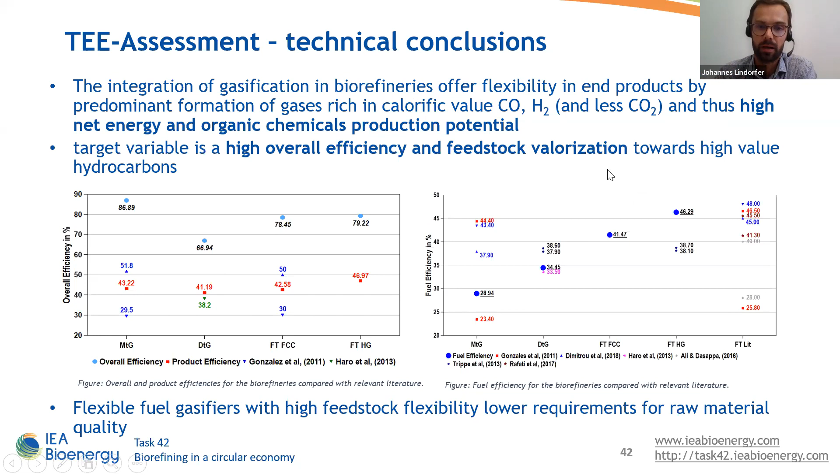We compared the results of the case study with other literature, and especially the flexible fuel gasifier with high feedstock flexibility and low requirements for raw material quality with a very high efficiency is an absolutely favorable concept that can really pave the way as a technology for the decarbonization of the transport sectors, but also for other base chemical sectors like plastics, as Jitka also highlighted.

So what are the environmental conclusions on our work here? The main focus is really here to showcase significant carbon dioxide and global warming reductions, because these are the real drivers for those technologies. And we calculated this with factor-based calculations, but considering also upstream emissions. So still quite a concise option and method.

We avoided allocation procedures because we really looked at the multi-product systems and compared it with the fossil reference system, not just taking the single fuel, but also the chemical product into consideration. And the results are quite astonishing, or probably not astonishing, but quite promising, because the CO2 saving potentials in all the compared studies are above 90%, which is a really high one.

So what is decisive for that is the input in terms of process energy. So an integrated setup where you have the renewable energy supply in the plant, in the setup, might lead to a bit higher primary energy consumption, but is really needed for a comprehensive sustainability claim. And for sure, with all the different technologies and options going for the same feedstocks, stringent sustainability criteria are quite relevant.

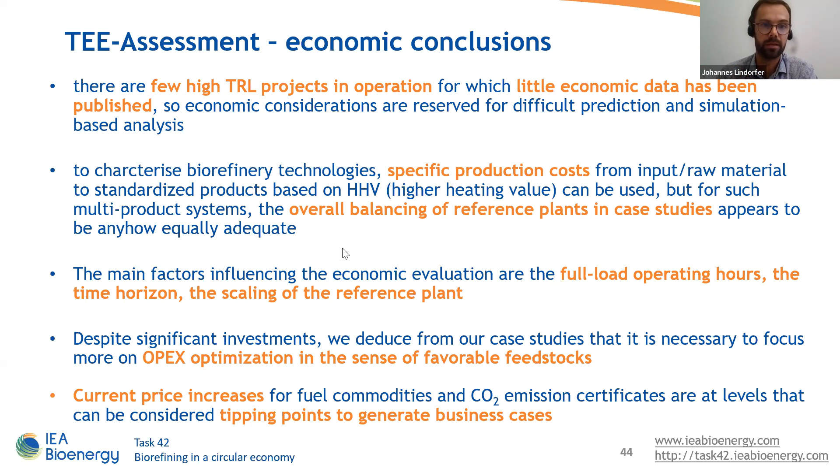And the current price increases that we see in the last couple of months are really potential tipping points to generate business cases for gasification-based biorefineries that have probably not been in place in the last 10 to 15 years. The method itself is dedicated for early design stages of technological implementation to really derive recommendations. Where are the hotspots in terms of economics, probably also efficiencies from the technical perspective, but also from the environmental perspective. And we have this modular approach that every unit operation has its own data set, so it can potentially be combined to find the right opportunities towards a sustainable process setup.

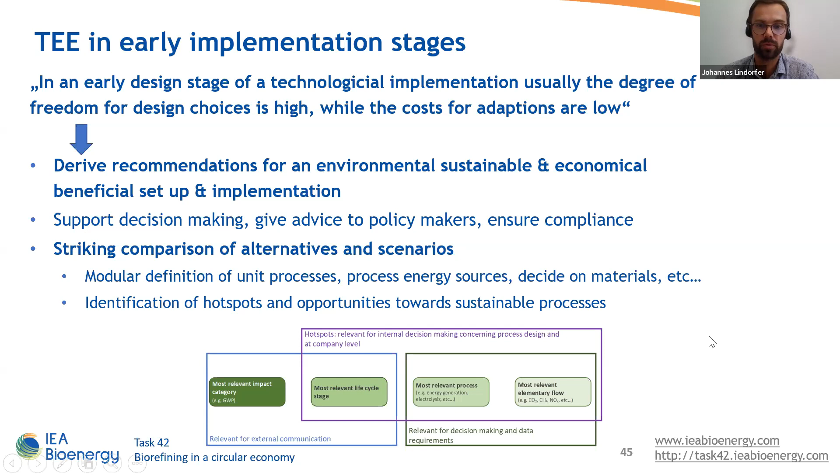So to sum up, with that, I'm done with my presentation. You might think, okay, where can I read about it? We are actually finalizing a report on these case studies, and it's to be published this summer. So please stay in contact and look for it when it's published. And there are some other references on the topic where we evolved the method. So with that, thank you very much for your kind listening, and input and questions are always welcome.

Thanks a lot. Thank you, Johannes. It's a nice overview of how LCA work and support, basically what we're doing with gasification. There's still some questions left in the chat, and I don't think we have answers to all of them. But I would like to invite the other authors and Donatella, the other speaker, on stage. Maybe we can go through them. We still have some time left.

We start with the first one by Butaina Ali, who asked, and I think maybe Johannes, you have an idea on this: what is the best way to enhance the efficiency of integrated biorefineries? Yeah, I think in my personal point of view, there are different ways of interpreting efficiency. So from the technical perspective, you have very common formulations in terms of carbon to product efficiency, right? So coming from the feedstock and transferring as much as possible towards standardized and marketable products.